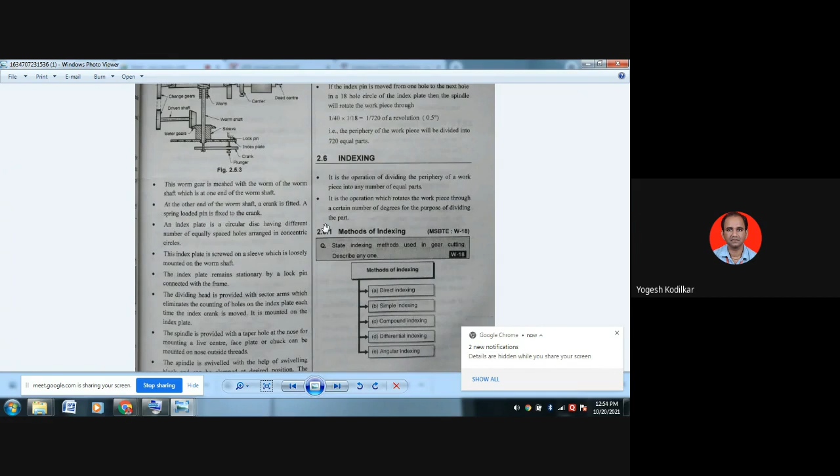That is your indexing. I told you, just like when in a classroom someone has to point out something, not only in classroom, in general also, whenever I have to point out something, I point it with my index finger. I use that index finger. In that way the process is called indexing. Because that's how the process got the name indexing - we are pointing out which part is to be machined in the form of tooth or teeth, or which part is to go further by rotating the crank only. Right, on which part to do machining, on which part not to do machining. So in that way I am pointing out with the help of the crank pin.

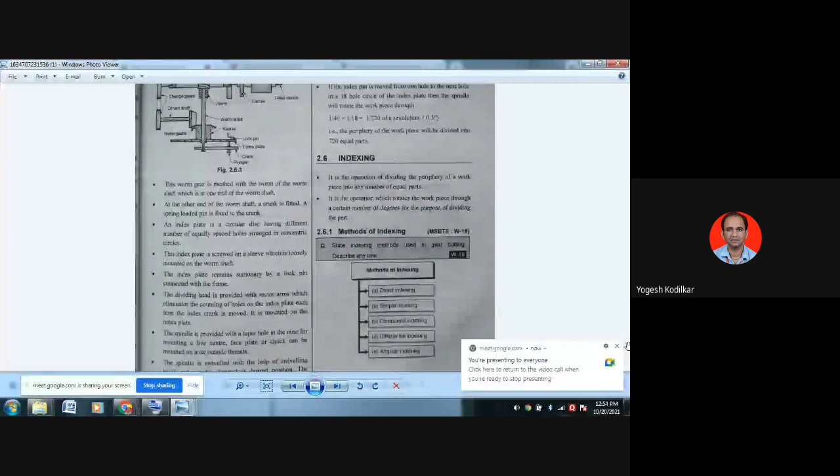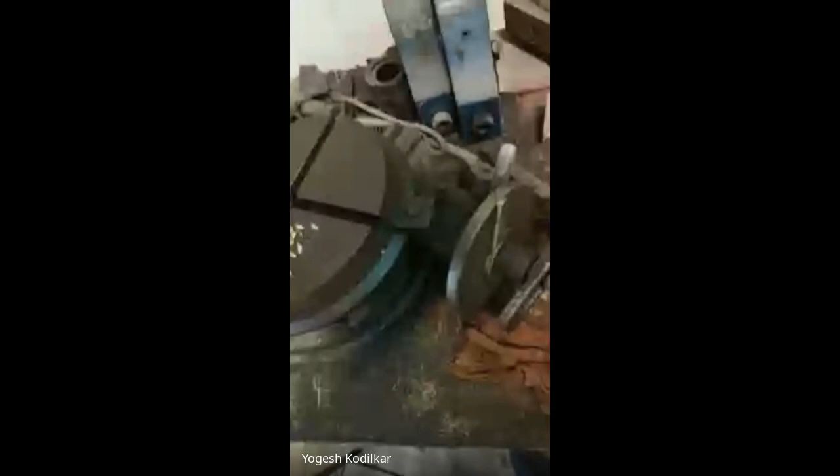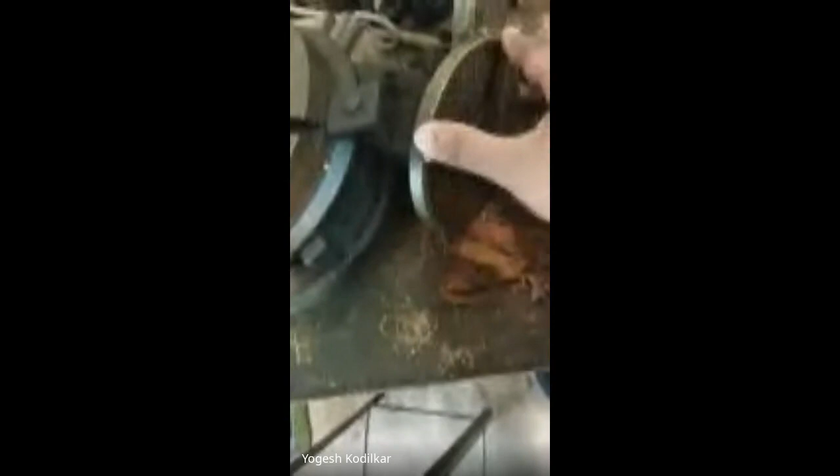As per the number of teeth required, you have to select the number of teeth using that calculation. This is the sector arm, which is there for that particular purpose. This sector arm can move, meaning you can combine the number of holes as per your required divisions, so you can set that. These are the two sector arms of the dividing head mechanism.

With the help of the dividing head mechanism you can produce the gears. Is it clear, students?

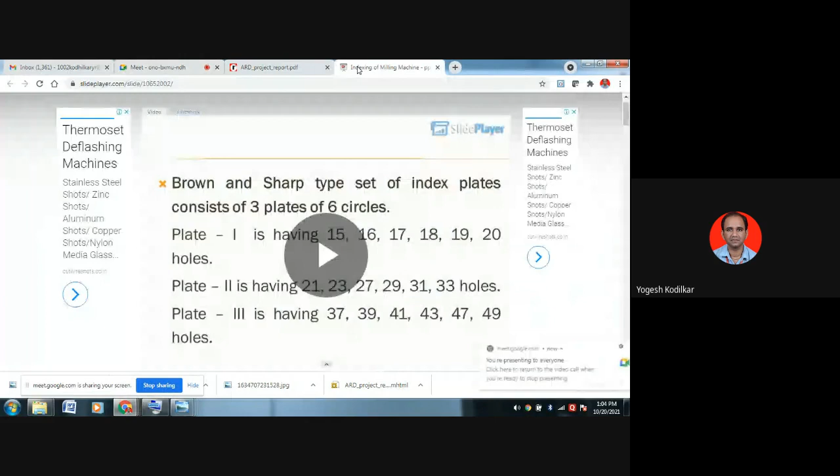Direct indexing or rapid indexing is the first part we are looking at. In that direct indexing or rapid indexing, the index plate has a 24 hole circle, which is then fitted to the front end of the spindle nose.

This 24 hole circle plate can divide the periphery of the workpiece into 2, 3, 4, 6, 8, 12, 24 equal divisions using this direct or rapid indexing plate.

So the index movement, the number of holes to be moved, is given as 24 upon n, because in direct or rapid indexing, the index plate has 24 number of hole circles. So in direct indexing, rapid indexing problems, the number of holes to be moved during gear management, you have to move by 24 upon n.

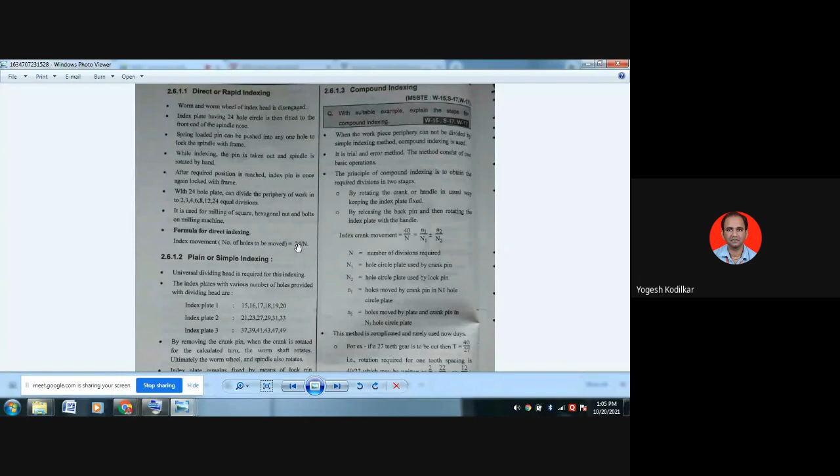N is the number of gear teeth you have to produce. So that is your direct indexing. Then next is plain or simple indexing.

In this second type of indexing, a universal dividing head is required. The index plate and various hole circles provided are in standard format: index plate 1, index plate 2, and index plate 3. All these three plates will be having a number of holes across their periphery.

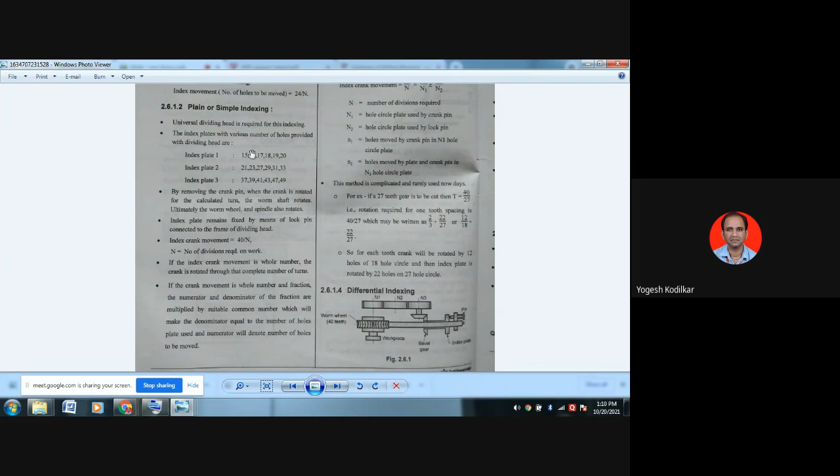मला जे नंबर ऑफ होल्स प्लेट दिसत आहेत त्यातलं कुठलं तरी स्टँडर्ड होल्स प्लेट मला सिलेक्ट करता येते का, तर ते होल प्लेट मॅच होण्यासाठी मला एका मल्टिप्लाइंग नंबरने न्यूमरेटर तसेच डिनोमिनेटर मल्टिप्लाय करायचं, सो दॅट विल डिनोट द नंबर ऑफ होल्स टू बी मूव्ड. मग त्या नंबर ऑफ होल्स मला मूव्ह करता येतील as per that plain indexing or simple indexing. सो दॅट इज युअर प्लेन इंडेक्सिंग 40/n.

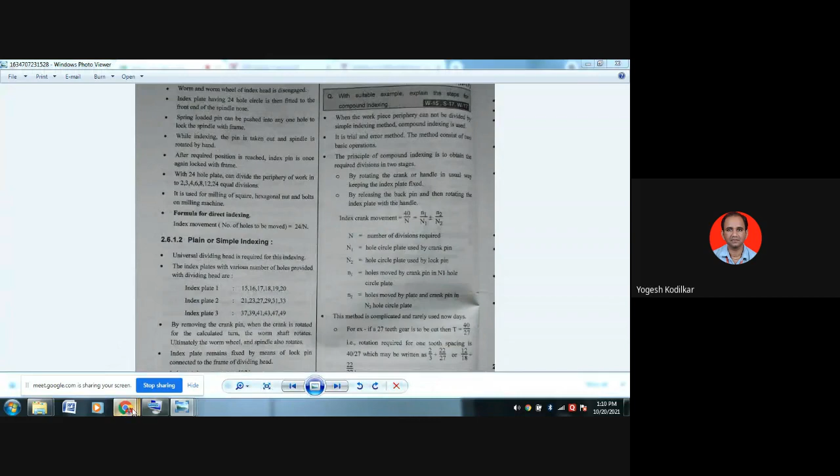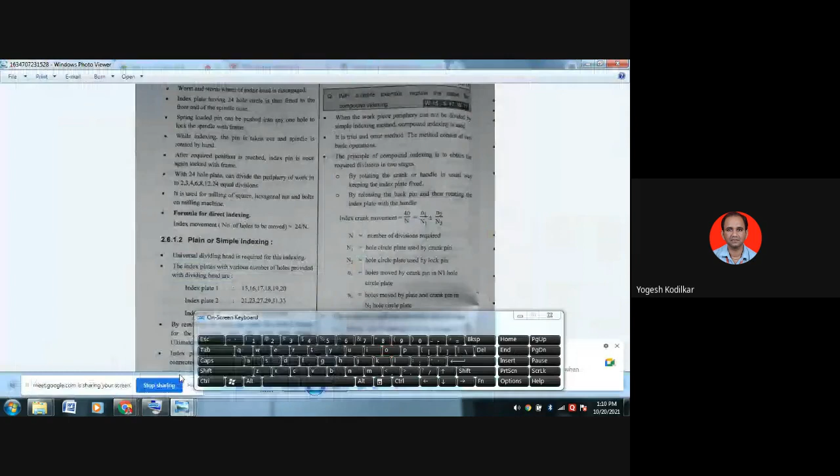So in the next part, suppose with a suitable example we write down the compound indexing. आता लक्षात घ्या स्टुडंट, थर्ड पार्ट काय आहे, कंपाऊंड इंडेक्सिंग आहे. हॅलो स्टुडंट्स, लक्ष आहे का सगळ्यांचं? पहिल्यांदा आपण प्लेन इंडेक्सिंग बघितलं, फर्स्ट पार्टमध्ये आपण डायरेक्ट इंडेक्सिंग बघितलं, डायरेक्ट अँड रॅपिड इंडेक्सिंग. सेकंड पार्टमध्ये आपण प्लेन इंडेक्सिंग बघितलं.

डायरेक्ट इंडेक्सिंगमध्ये काय होतं, that index movement is equal to 24/n. हा फॉर्म्युला आहे बघा, आणि प्लेन इंडेक्सिंगमध्ये तो फॉर्म्युला आहे 40/n. But sometimes there are some work peripheries which cannot be divided by same simple indexing also. काही काही वर्क पेरिफरी, काही काही प्रकारचे गिअर्स, नंबर ऑफ टीथ आहे, जे आपल्याला सिम्पल इंडेक्सिंग मेथडने सॉल्व्ह करता येत नाही.

Then we have to go for this compound indexing method. पुढचा पार्ट जो आहे that is called as the compound indexing. It is the trial and error method. हॅलो स्टुडंट, आवाज येतो का, लक्षात आहे सगळ्यांचं? आपण तिसरा पार्ट शिकतोय कंपाऊंड इंडेक्सिंग. तर कंपाऊंड इंडेक्सिंग कुठे वापरतो आपण, ज्या ठिकाणी सिम्पल इंडेक्सिंगने तुम्हाला प्रॉब्लेम सॉल्व्ह करता येत नाही, सिम्पल इंडेक्सिंगने तो गिअर मॅनेज होत नाही, त्या ठिकाणी आय हॅव टू गो फॉर दिस कंपाऊंड इंडेक्सिंग. सो इन दिस कंपाऊंड इंडेक्सिंग आय हॅव टू यूज द पर्टिक्युलर मेथड, मग ती कशी वापरायची, इट इज अ ट्रायल अँड एरर मेथड.

द मेथड कन्सिस्ट ऑफ टू बेसिक ऑपरेशन्स. मेथडमध्ये दोन ऑपरेशन्स आहेत बघा. द प्रिन्सिपल ऑफ कंपाऊंड इंडेक्सिंग इज टू ऑब्टेन द रिक्वायर्ड डिव्हिजन इन टू स्टेजेस. ते दोन स्टेजेस कुठले बघा, बाय रोटेटिंग द क्रँक अँड हँडल, जो क्रँक बघितला आपण तो सर्क्युलर क्रँक. सो बाय रोटेटिंग द क्रँक अँड हँडल इन युज्युअल वे, कीपिंग द इंडेक्स प्लेट फिक्स. ती जी इंडेक्स प्लेट आहे सर्क्युलर प्लेट, ती मला फिक्स ठेवायची, त्यामुळे मला फक्त इनिशियली पहिल्या स्टेजला फक्त क्रँक अँड हँडल रोटेट करायचं.

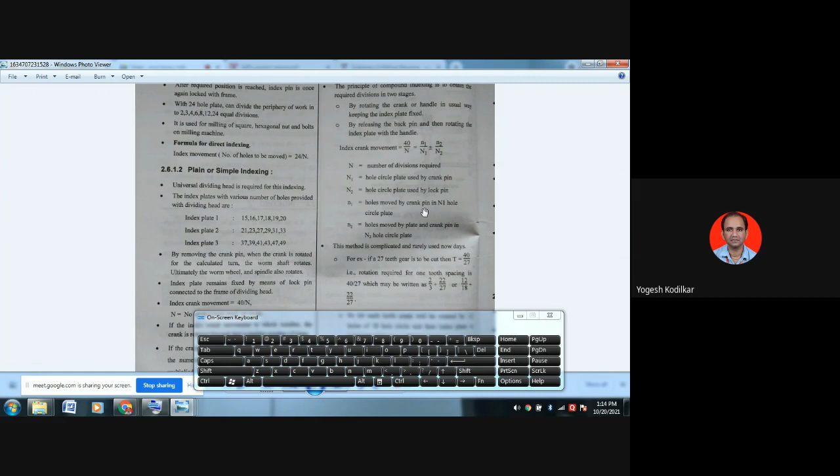n1 is the holes moved by crank pin in N1 hole circle plate, whereas n2 is the holes moved by plate and crank pin in n2 hole circle plate. So these are the small n1, n2. Capital N1, N2 is the hole circle plate used by crank pin and lock pin, whereas small n1, n2 is the holes moved by crank pin. In that N1 hole circle plate, how many holes I move, that is small n1, and similarly on that N2 hole circle plate, whatever holes I am moving, that is small n2. Now let's see a simple problem next.

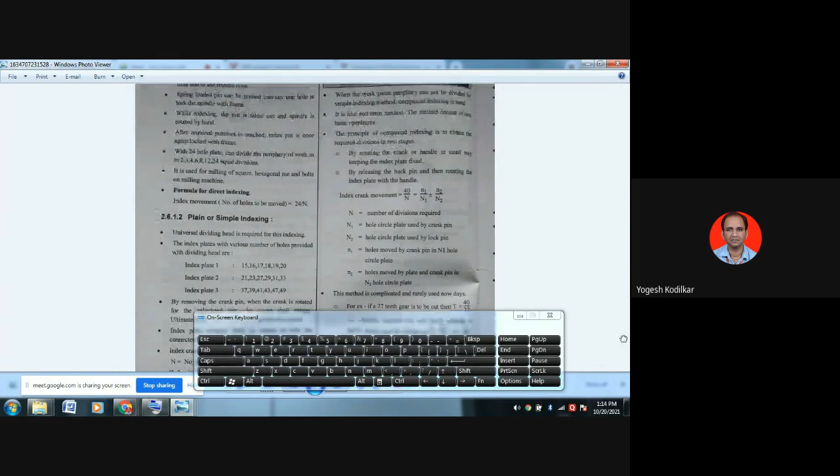So this method is complicated and rarely used nowadays. Compound indexing method is somewhat complicated and it is not normally used. We are normally using plain indexing or simple indexing, or also direct indexing. Compound indexing is a somewhat complicated method. We'll just look at one simple example.

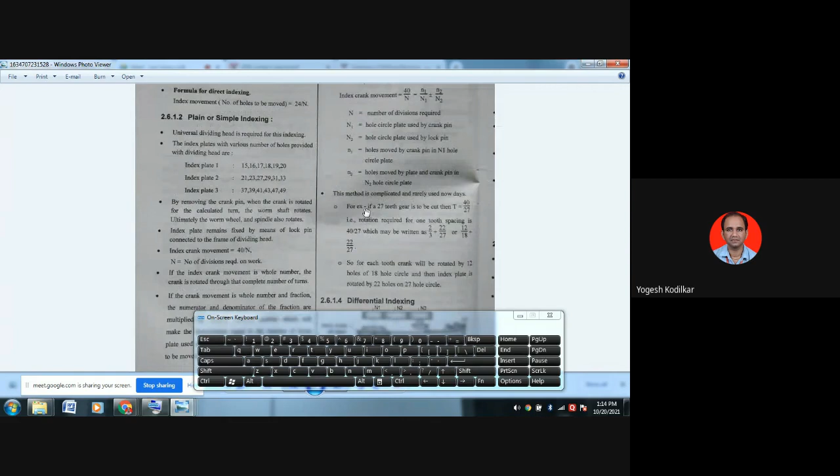For example, if a 27 gear is our N, the number of divisions, that is N. If a 27 gear teeth is to be cut, as that is a compound indexing, the formula will be T equals 40 upon N. Number of turns, turns will be equal to 40 upon capital N, that N is 27. So that will become 40 upon N, and the calculation will become as, just a minute.

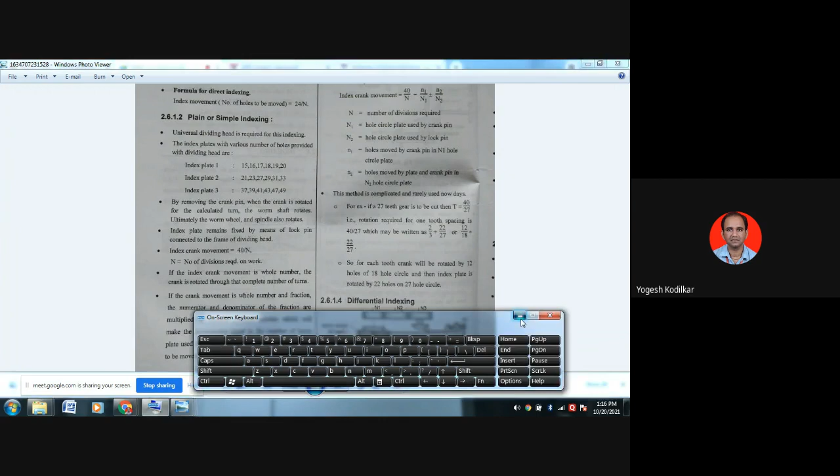So students will see this compound indexing problem. Compound indexing is like, let's take the problem briefly. If a 27 gear teeth is to be cut, then T is equal to 40 upon capital N, that N is equal to 27. N is 27, that capital N is given as 27. So that is the rotation required for one teeth spacing, 40 upon 27.

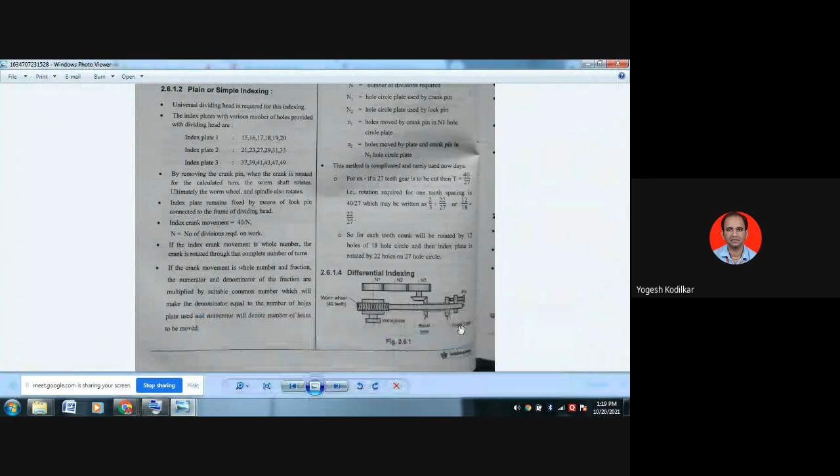So that is differential indexing. Differential indexing is one of the some advanced kind of indexing. Just a minute student, we'll see some YouTube video also. Just wait.

Indexing of milling machines.

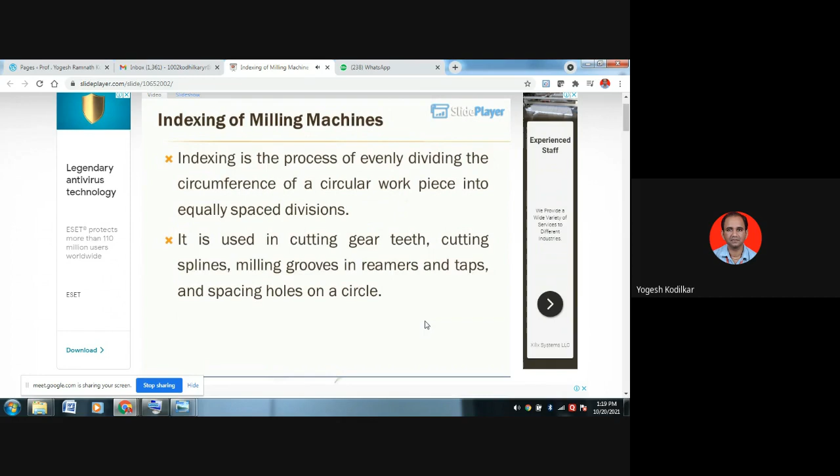Indexing is the process of evenly dividing the circumference of a circular workpiece into equally spaced divisions. It is used in cutting gear teeth, cutting splines, milling grooves in reamers and taps, and spacing holes on the circle.

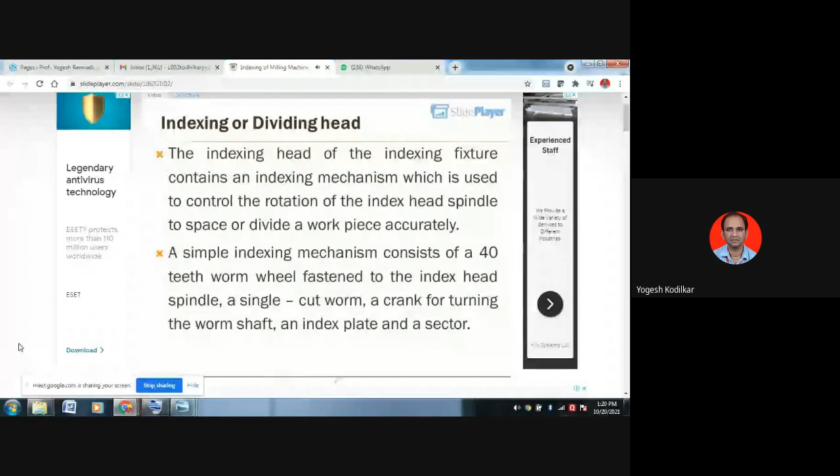Indexing or dividing head: the indexing head of the indexing fixture contains an indexing mechanism which is used to control the rotation of the index head spindle to space or divide a workpiece accurately. A simple indexing mechanism consists of a 40-teeth worm wheel fastened to the index head spindle, a single cut worm, a crank for turning the worm shaft, an index plate, and a sector.

Since there are 40 teeth in the worm wheel, one turn of the index crank causes the worm wheel and the index head spindle to make 1/40th of a turn. So, 40 turns of the index crank revolve the spindle one full turn.

Index plate: the indexing plate is a round plate with a series of 6 or more circles of equally spaced holes. The index pin on the crank can be inserted in any hole in any circle. With the interchangeable plates regularly furnished with most index heads, the spacing necessary for most gears, bolt heads, milling cutters, and splines can be obtained.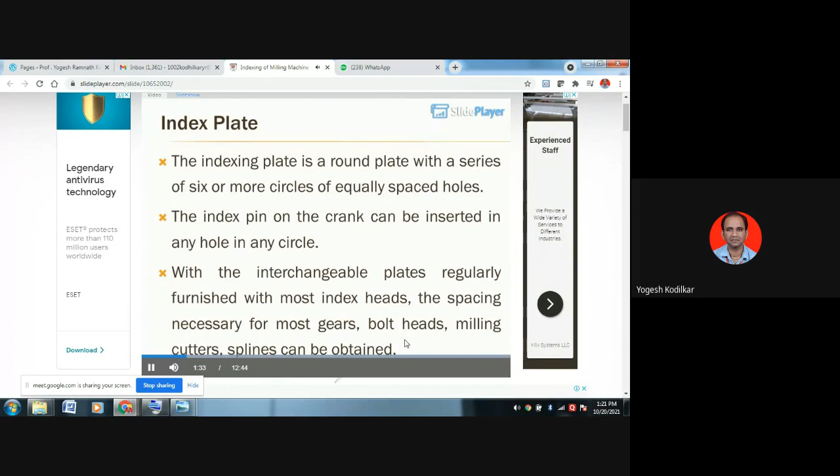Brown and Sharpe type set of index plates consists of 3 plates of 6 circles. Plate 1 has 15, 16, 17, 18, 19, 20 holes. Plate 2 has 21, 23, 27, 29, 31, 33 holes. Plate 3 has 37, 39, 41, 43, 47, 49 holes.

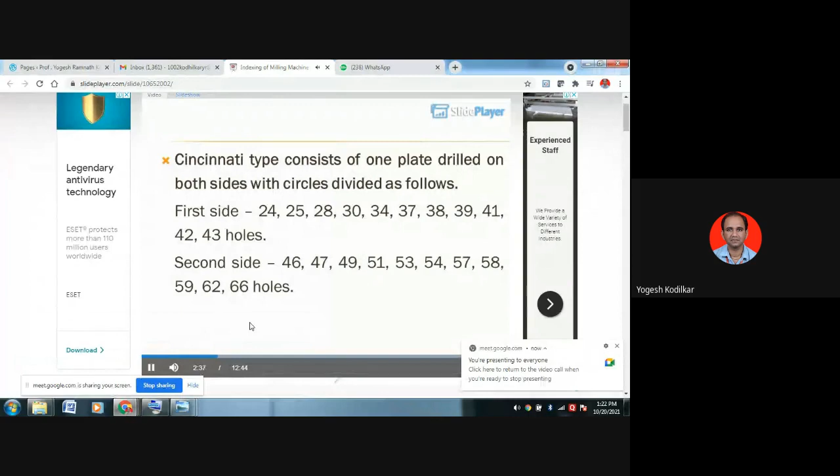Cincinnati type consists of 1 plate drilled on both sides with circles divided as follows. First side: 24, 25, 28, 30, 34, 37, 38, 39, 41, 42, 43 holes. Second side: 46, 47, 49, 51, 53, 54, 57, 58, 59, 62, 66 holes.

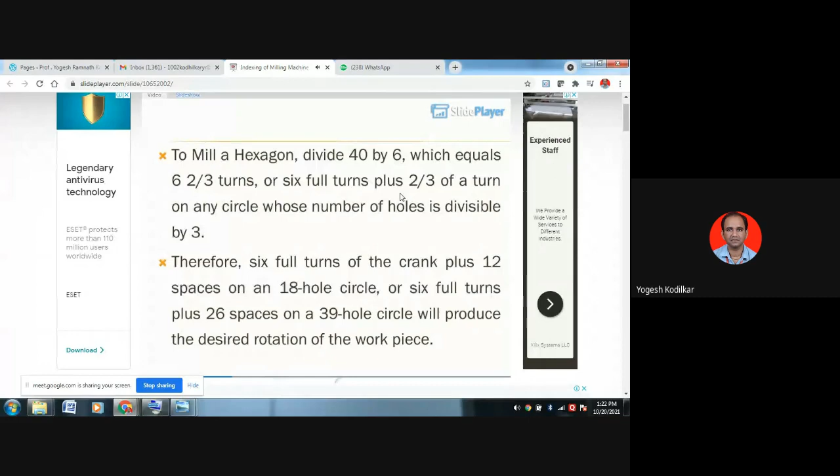To mill a hexagon, divide 40 by 6, which equals 6 2/3 turns, or 6 full turns plus 2/3 of a turn on any circle whose number of holes is divisible by 3. Therefore, 6 full turns of the crank plus 12 spaces on an 18-hole circle, or 6 full turns plus 26 spaces on a 39-hole circle, will produce the desired rotation of the workpiece.

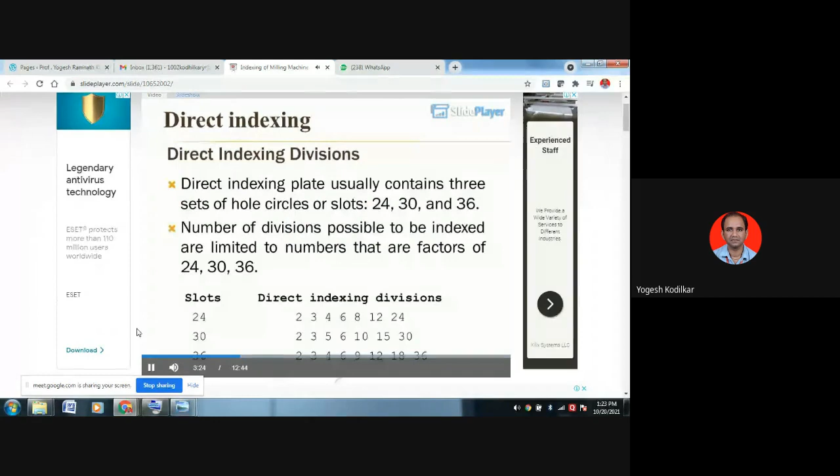Direct indexing plate usually contains 3 sets of hole circles or slots: 24, 30, and 36. The number of divisions possible to be indexed are limited to numbers that are factors of 24, 30, 36. Plain direct indexing divisions: for 24 - 2, 3, 4, 6, 8, 12, 24. For 30 - 2, 3, 5, 6, 10, 15, 30. For 36 - 2, 3, 4, 6, 9, 12, 18, 36.

To mill 8 flutes on a reamer blank. Since the 24-hole circle is the only one divisible by 8, the required number of divisions, it is the only circle that can be used in this case.

Plain direct indexing divisions: for 24 - 2, 3, 4, 6, 8, 12, 24. For 30 - 2, 3, 5, 6, 10, 15, 30. For 36 - 2, 3, 4, 6, 9, 12, 18, 36. Never count the hole or slot in which the index pin is engaged.

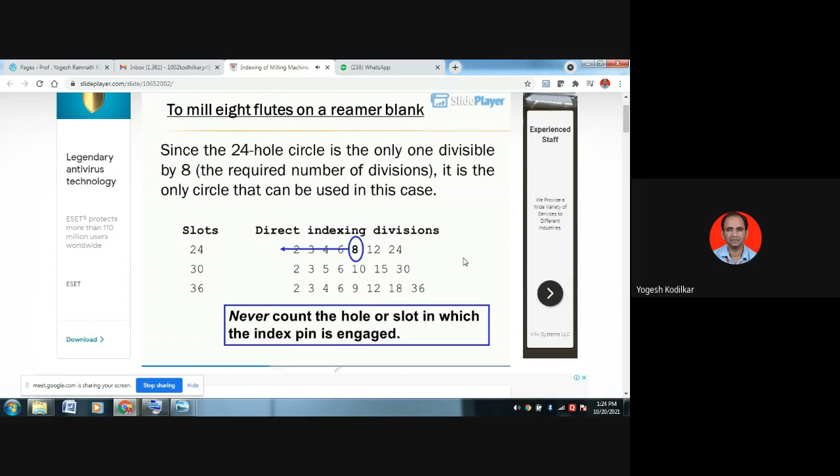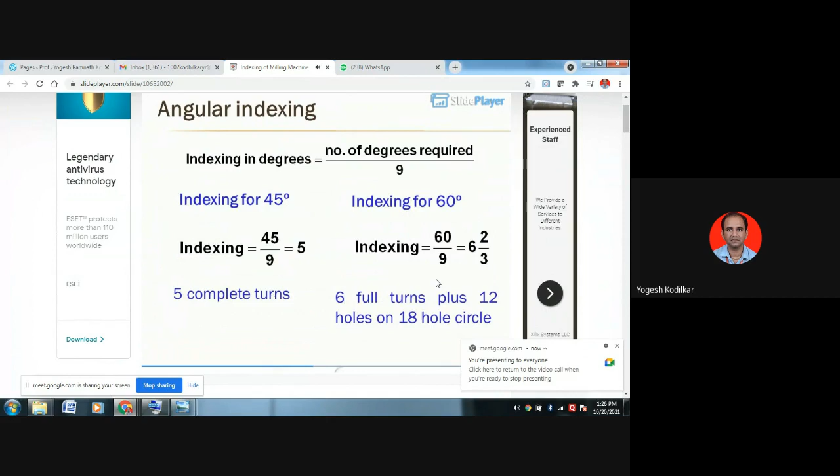Angular indexing: indexing for 45 degrees, indexing for 60 degrees, 5 complete turns. 6 full turns plus 12 holes on an 18 hole whole circle.

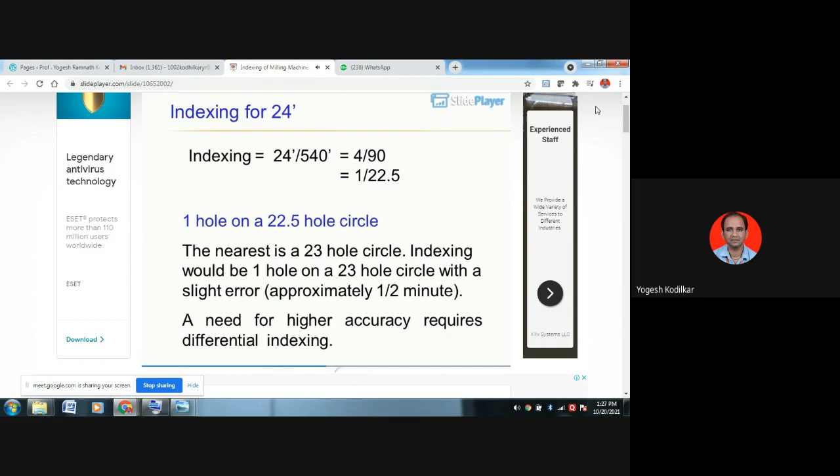Indexing would be 1 hole on a 23 hole circle with a slight error, approximately half a minute. A need for higher accuracy requires differential indexing. Convert 9 degrees to minutes: 9 degrees times 90 equals 540.

Calculate indexing for 24 degrees 30 minutes. 24 times 60 equals 1,440. Now add 30, equals 1,470.

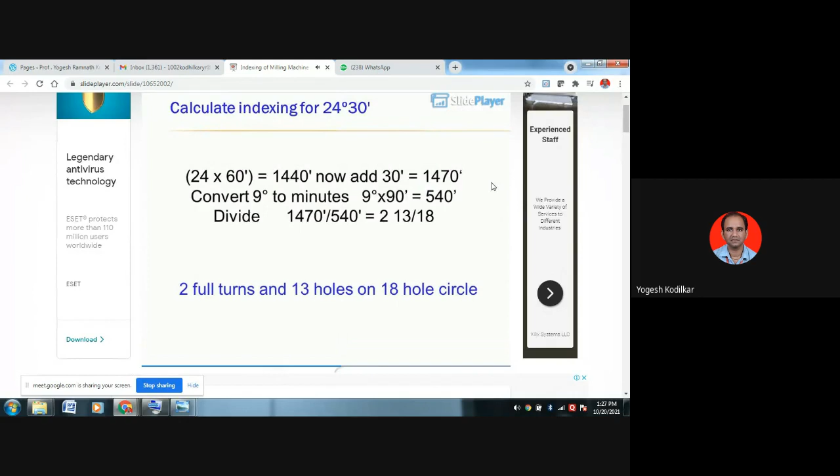Convert 9 degrees to minutes: 9 degrees times 90 equals 540. Divide 1,470 by 540 equals 2 13/18. That gives 2 full turns and 13 holes on an 18 hole circle. This is differential indexing.

The index plate must be revolved either forward or backward a part of a turn while the index crank turns, to attain proper spacing. This change of rotation is effected by an idler gear or gears in the gear train.

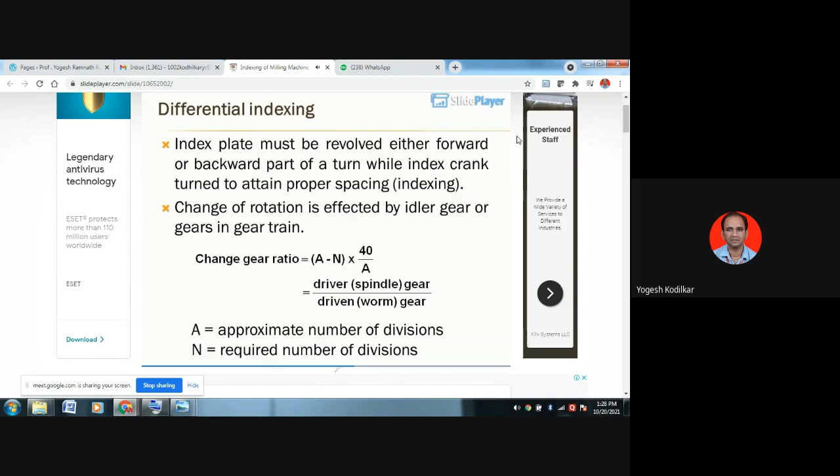A equals approximate number of divisions. N equals required number of divisions. If A is greater than N, the resulting fraction is positive and the index plate must move in the same direction as the crank, clockwise; this positive rotation uses an idler gear. If N is greater than A, the resulting fraction is negative and the index plate must move counterclockwise; this negative rotation requires the use of 2 idler gears.

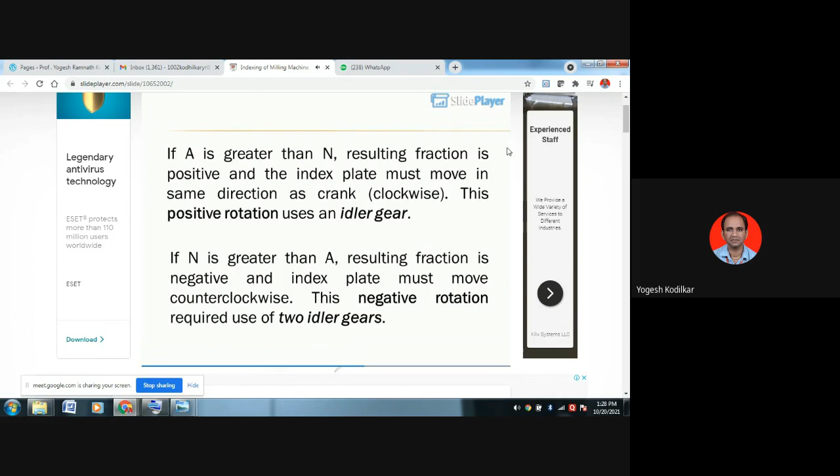For a number 57 hole circle, select a number close to 57. Indexing for 57 divisions: the change gears supplied with the dividing head are as follows: 24, 24, 28, 32, 40, 44, 48, 56, 64, 72, 86.

The available index plate hole circles are as follows. Plate 1: 15, 16, 17, 18, 19, 20. Plate 2: 21, 23, 27, 29, 31, 33. Plate 3: 37, 39, 41, 43, 47, 49.

Choose plate 2, 21 holes. 5 sevenths would be 15 holes on a 21 hole circle.

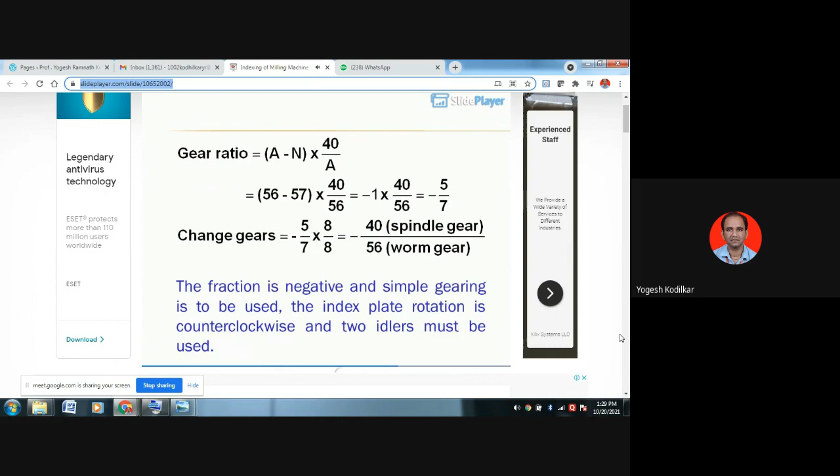For a number 57 hole circle, select a number close to 57. The fraction is negative, so simple gearing is to be used. The index plate rotation is counterclockwise and 2 idlers must be used.

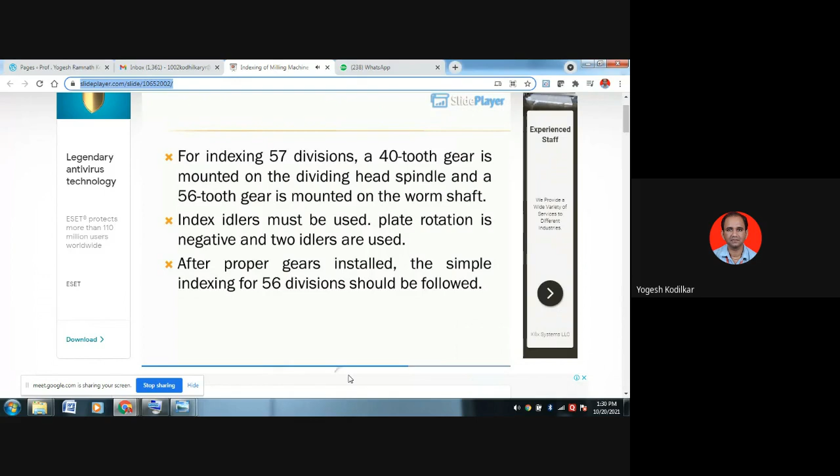For indexing 57 divisions, a 40-tooth gear is mounted on the dividing head spindle and a 56-tooth gear is mounted on the worm shaft. Idlers must be used since the plate rotation is negative and 2 idlers are used. After the proper gear is installed, the simple indexing for 56 divisions should be followed.

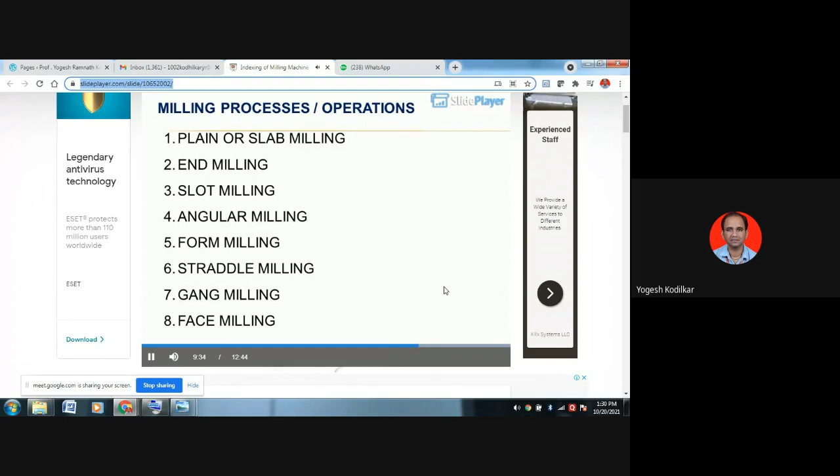Milling processes and operations: plain or slab milling, end milling, slot milling, angular milling, form milling, straddle milling, gang milling, face milling, and plain or slab milling.

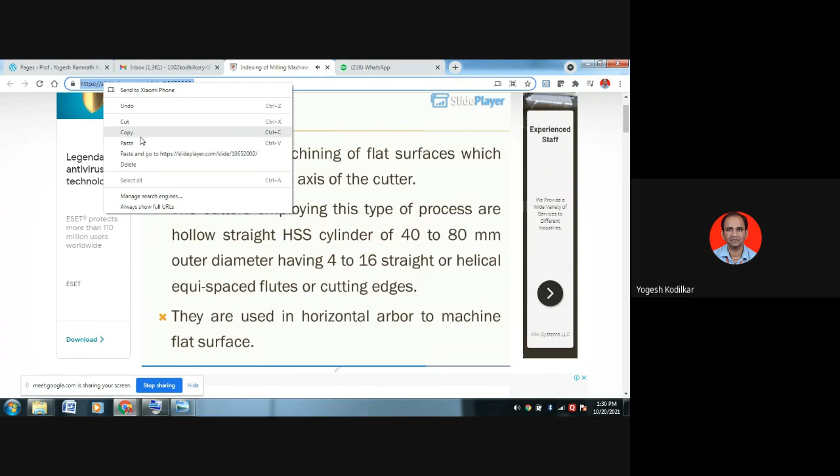Plain or slab milling is used for machining flat surfaces which are parallel to the axis of the cutter. The cutters used in this process are hollow straight HSS cylinders of 40 to 80 millimeters outer diameter, having 4 to 16 straight or helical equi-spaced flutes or cutting edges. They are used on a horizontal arbor to machine flat surfaces.

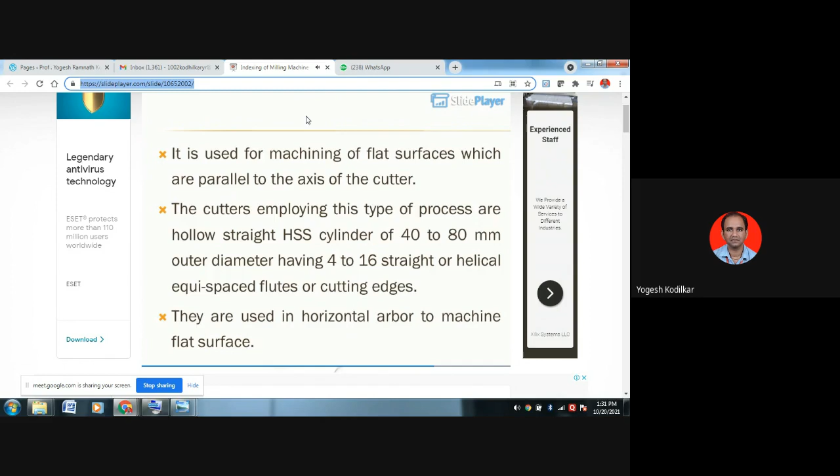End milling cutters are commonly made of HSS, with 4 to 12 straight or helical teeth on the periphery, and face diameter ranges from about 1 millimeter to 40 millimeters. It is the most versatile and widely used process in vertical spindle type milling machines.

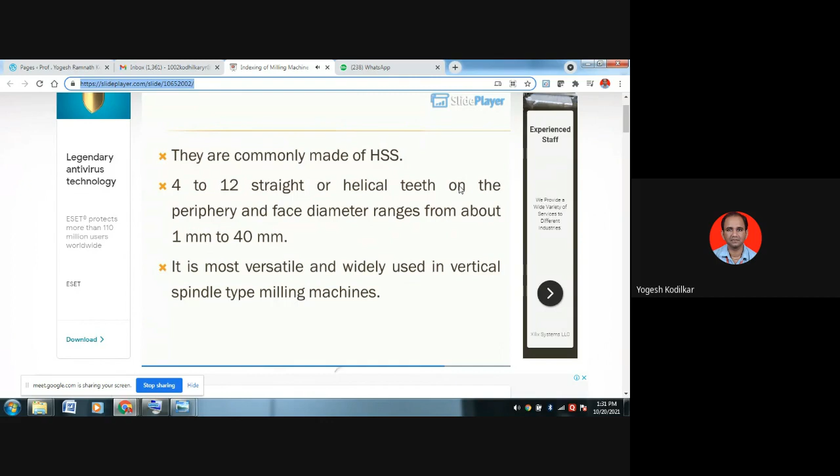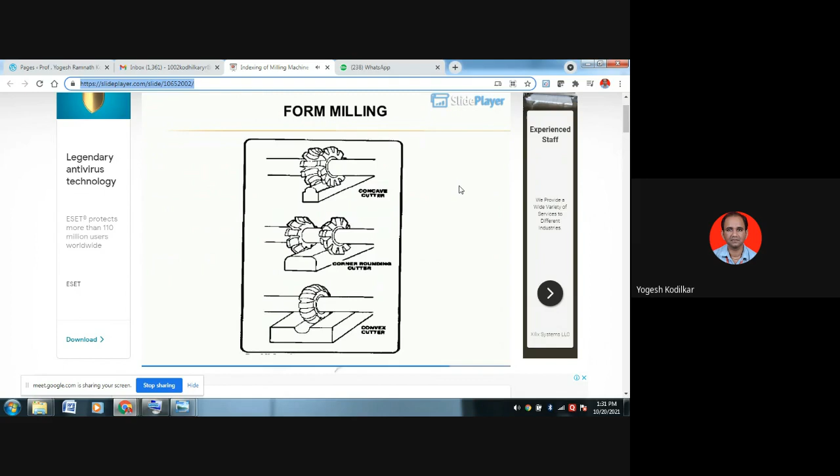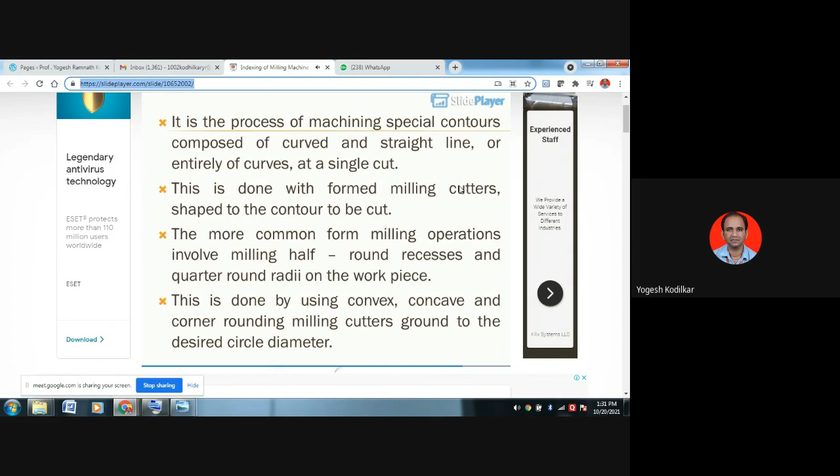Form milling is the process of machining special contours composed of curved and straight lines, or entirely of curves, in a single cut. This is done with formed milling cutters, shaped to the contour to be cut. The more common form milling operations involve milling half-round recesses and quarter-round radii on the workpiece, using convex, concave and corner rounding milling cutters ground to the desired circle diameter.

Straddle milling is used for fast and accurate machining of two parallel vertical surfaces.

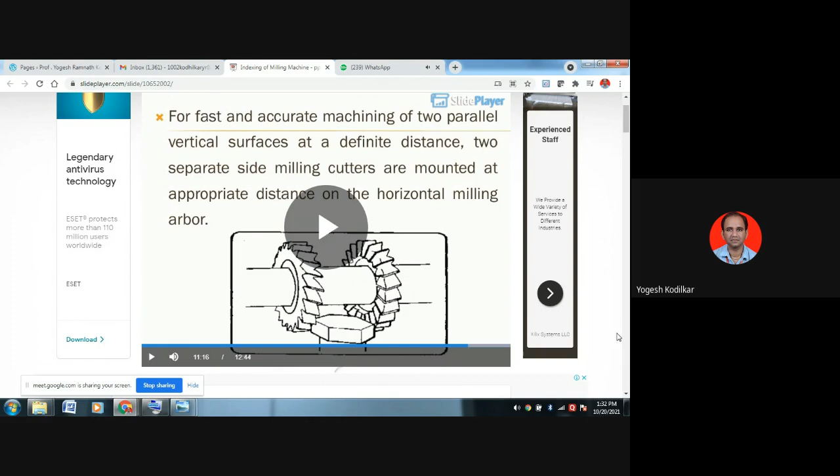Both heads I have to machine at corners. At the end I need to do machining, with the help of these two cutters having some spacing as per your bolt head size. Both cutters are rotating on the same arbor - that is straddle milling. At a definite distance, two separate side milling cutters are mounted at appropriate distance on the horizontal milling arbor.

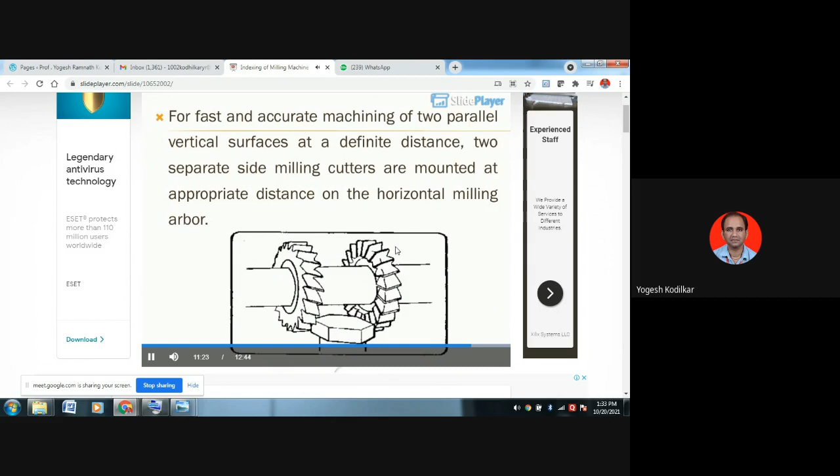Face milling is used for machining flat surfaces which are at right angles to the axis of the cutter.

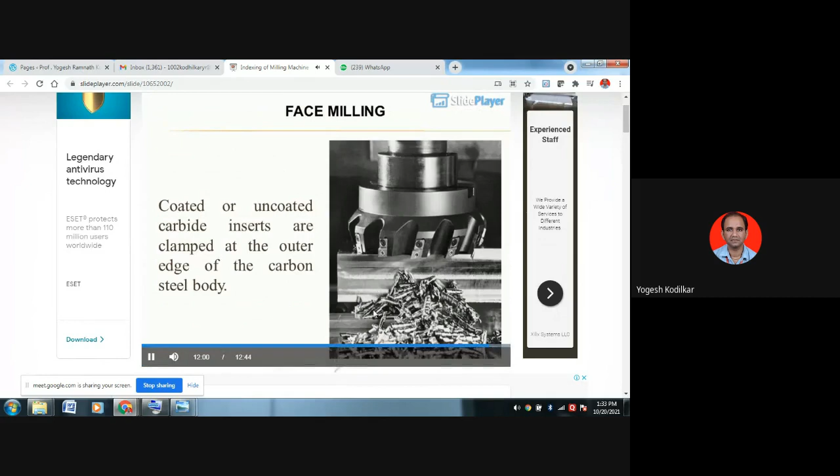The cutters employing this process are usually large in diameter, 80 to 800 millimeters, and heavy. They are used only for machining flat surfaces in different orientations. The cutter is mounted directly in the vertical and/or horizontal spindles. They are generally used for high production machining of large jobs. Coated or uncoated carbide inserts are clamped at the outer edge of the carbon steel body.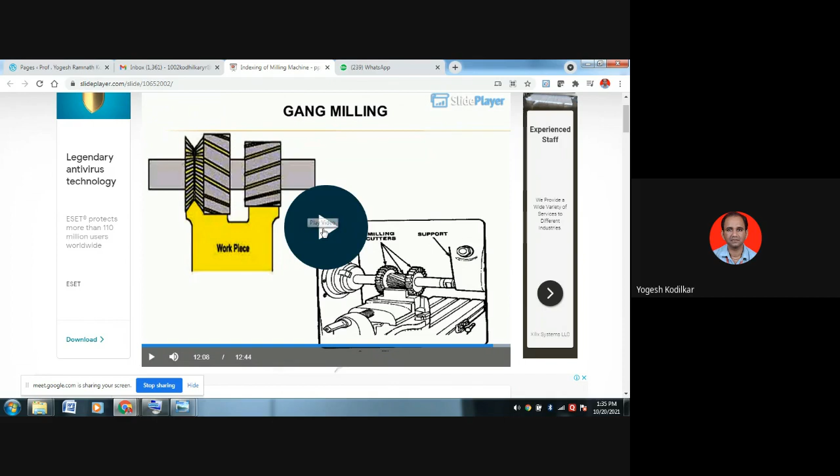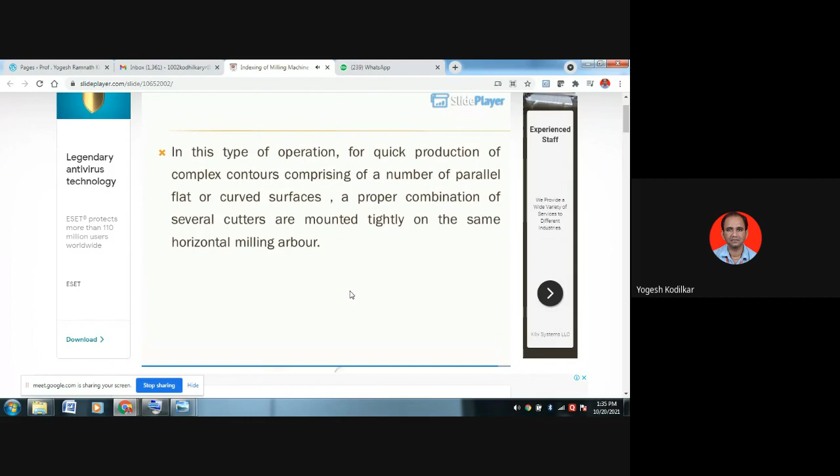In this type of operation, for quick production of complex contours comprising a number of parallel, flat or curved surfaces, a proper combination of several cutters are mounted tightly on the same horizontal milling arbor.

Angular milling is now used for angular machining - milling flat surfaces which are at an inclination to the axis of the cutter. A single angle milling cutter is used for angular surfaces such as chamfers and grooves. When milling dovetails, the usual angle of the cutter is 45, 50, 55, or 60 based on the design of dovetails.

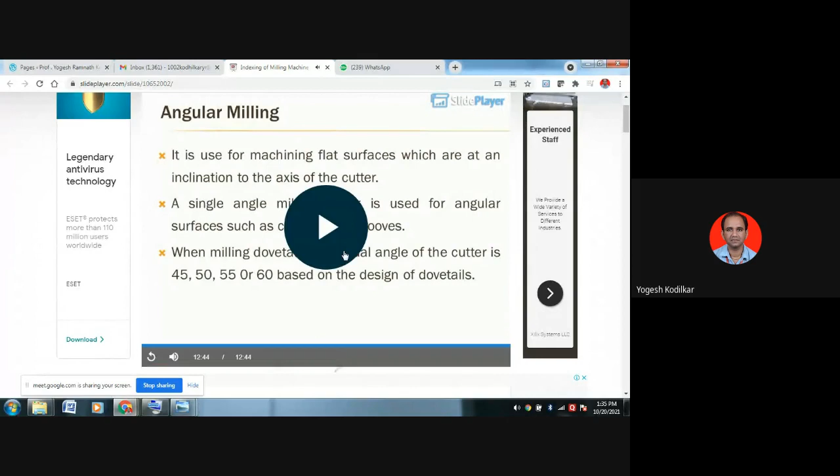So students, in this way, this is the milling part. Milling part is an important part as per your syllabus.